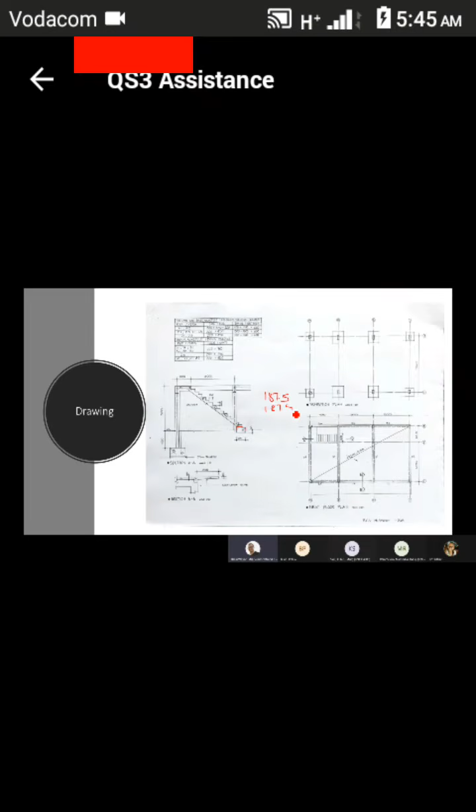So for me to ascertain what that height is there, I will take my front, 187.5. We'll see that. And I will assume that the back there is halfway into my next riser, and I say times one and a half, and I use that dimension there, and that gives me 281.25.

So for my back rise, for my back formwork, I will then say it will be a meter by 0.28. It will be the formwork at the back of my staircase, my stair base.

Right? And then I will also, now that I've done that, I now need to also measure the formwork to my risers. The formwork to my risers not exceeding 300 millimeters high, because the standard system tells us that for formwork to edges and risers not exceeding 300 millimeters high or wide will be measured in meters.

So I will now say that it's a meter wide, and I will now count the number of risers that I have over here. I will start from the top. 1, 2, 3, 4, 5, 6, 7, 8, 9, 10, 11, 12, 13, 14, and 15. So the formwork to my edges and risers not exceeding 300 millimeters high will be 15 times a meter. We'll have that.

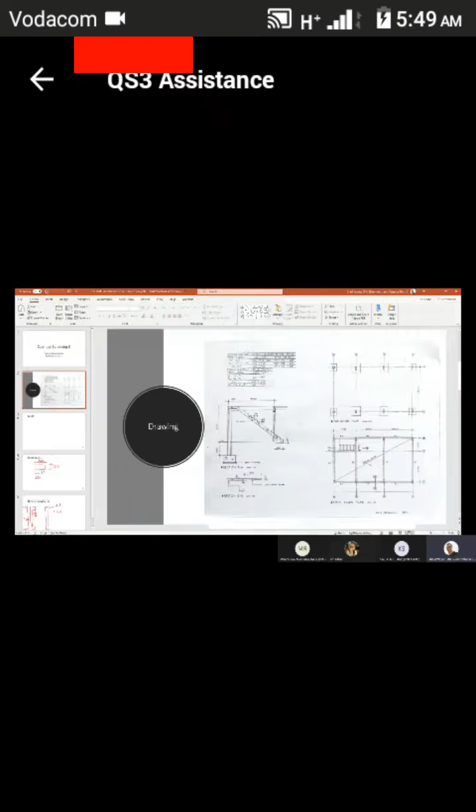Cooperating with me. So when I now look at my staircase, and I go further with my staircase, I would now look at the reinforced concrete that I need to supply in my staircase. The reinforced concrete will go in my staircase. If you can see, I will now have reinforced concrete go there,

there, and goes over there. Sorry, I've just drawn that roughly. But that is the concrete that will go into my staircase.

We'll say reinforced concrete 20 MPa, 19 millimeter stone, in stairs and landings. And I take that description straight from the standard system that says it will be in stairs and landings.

So I now need to first of all determine what this length is all the way down there. What that length is going to be. How do I determine that length? You'll notice that I have a length of 4 meter 400 in there. But where do I come on that length of 4 meter 400? Where do I come on that length?

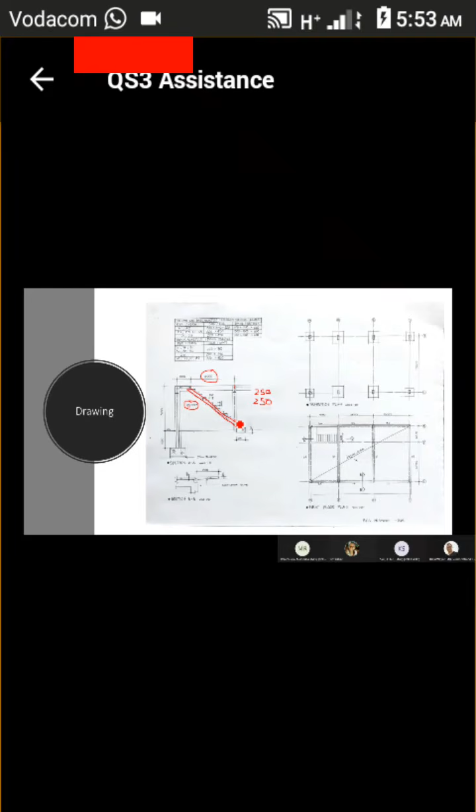I now need to add - what's the width? 250. And I need to add another 250. You all see that? Because my center - see, I need to add that, and I need to add that, because that is how far it goes. So there's 250 and 250 plus 3 meters. That gives me 3 meter 500.

You all with me? Yes, sir. So my horizontal, or my adjacent, is 3 meter 500.

Now I need to ascertain my opposite. Where's my opposite? I'm going to clear everything first. Again, you've got what I've just said here. Clear everything there. What is my opposite? Where will my opposite be determined from?

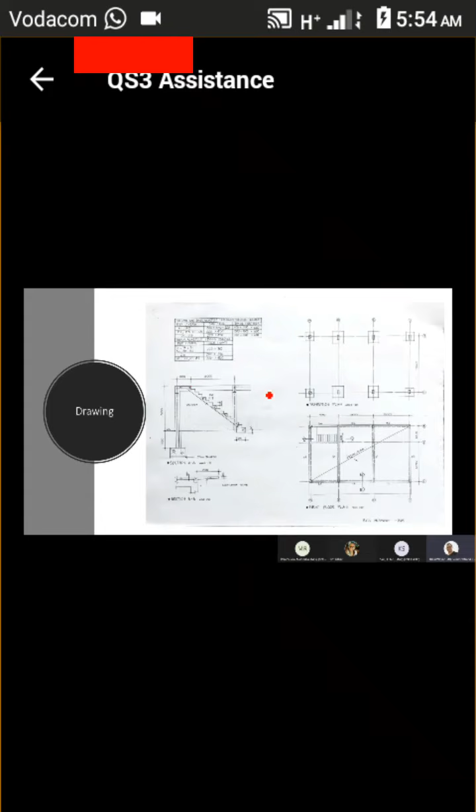I now need the height from there, from there. Let me draw it where it makes sense. I now need the opposite from there. From there to where? There. That's correct. I need that height.

I need that height. In order for me to get that height, I will take my 3 meters that I have here. My 3 meters is taken from the top of the slab, but I need to get to the bottom, so it will be 3 meters. I'll deduct my 150 - try and write a decent 0. Deduct my 150, which is my slab thickness.

What else do I need to do? I also need to deduct 187.5. All with me? Yes, sir. Deduct my 187.5. Anything else I need to deduct? Is that it?

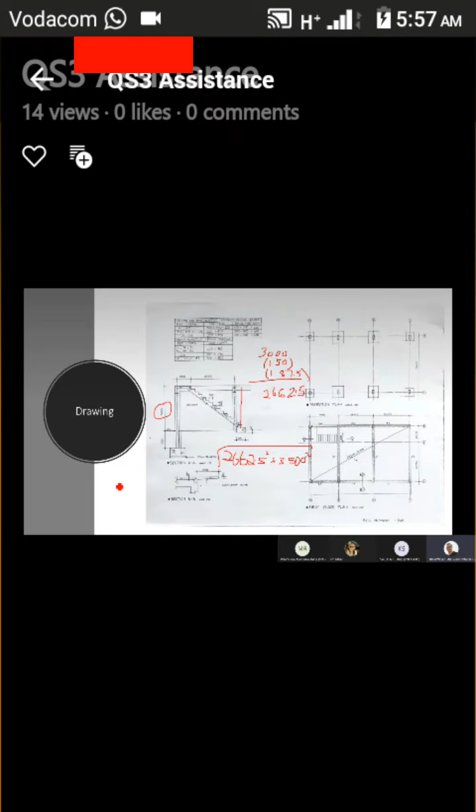Okay, so now I say 2662.5 squared, plus 3500 squared. The square root of that - what does that give me? I don't even have a calculator with me.

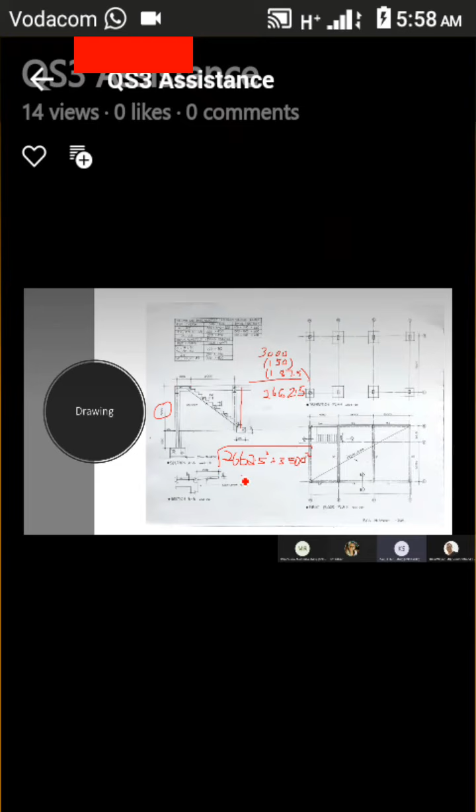What does that give me? It's 4,397.6 millimeters. But when I have to write that in meters, what will that be?

4.39 meters? No, it's 4.4 meters. You now see how I arrive at that 4.4 that I indicate in my dimensions. You see that?

Yes, sir. Right, so now you see that I'm taking my waist. Remember I said earlier that this dimension is what we will be working with first for the parallelogram that we had there, down there. So that will be 4.4 by the width of a meter by my 0.13, just for my waist.

And then for each one of my stairs, now 0.25, 0.19, and by length of those is meter, and that is times half, times how many? Times 15.

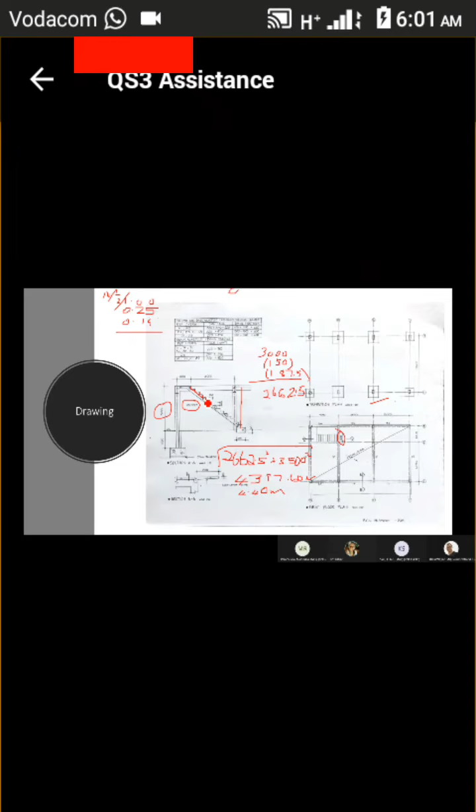Also remember that my lines are not the straightest, for my parallelogram that I had there. Can you see that my stairs, the actual stairs, that is 1, 2, 3, 4, 5, 6, 7, 8, 9, 10, 11, 12, 13, and 14. You see that?

You see that all this one here does, that first one, all that does is form a stair, yes, the riser to that very first stair, but it is not included in an actual stair that we see from there. Can you understand what I'm saying?

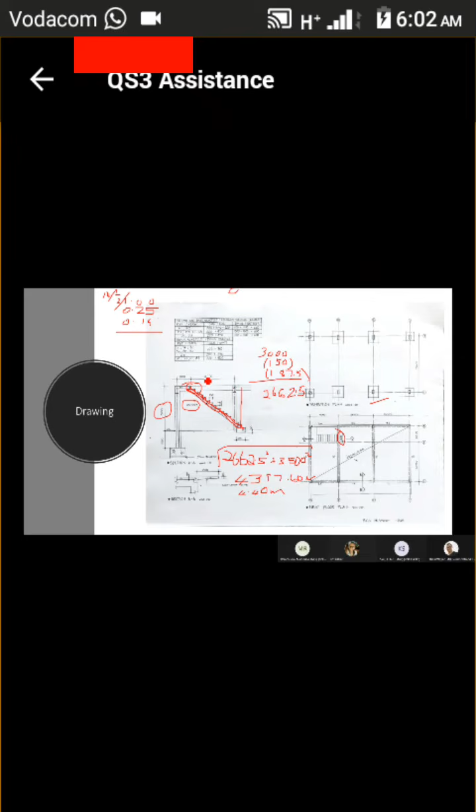I'm worried, there's silence now. I normally get a yes sir, but now I don't. Did you get what I said? I don't understand. Okay, I really don't understand. Okay, I'll show the rises again that I measured earlier.

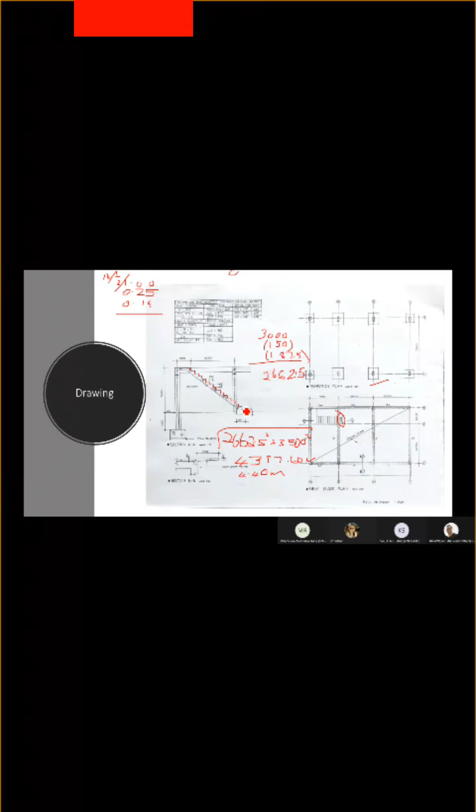The rises, count them with me. Got those rises, right? You agree with those rises? Yes, sir. Right.

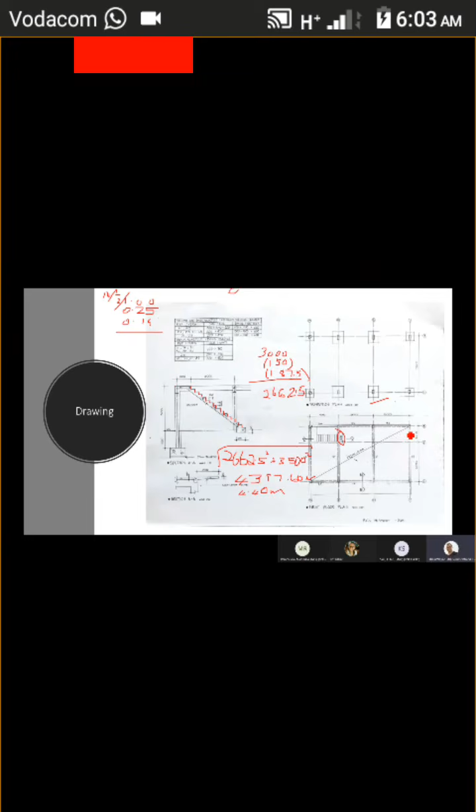Remember this slab, this forms part of the slab that we had measured here. You see that? Now I'm going to show the individual triangles for each stair. Oh, I wish I could draw this thing straight.

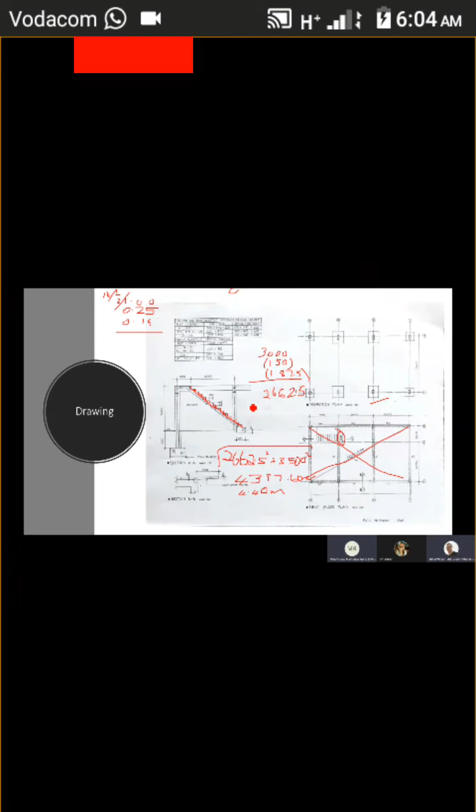How many triangles do you see over here? 1, 2, 3, 4, 5, 6, 7, 8, 9, 10, 11, 12, 13, 14. Do you agree with me? You see 14 triangles there? Yes, sir. Right, you see 14 triangles.

What did I leave out? I left out that one over there. See that? I left that one out. Why did I leave that one out? I left that one out because it forms part of the front of the landing, and it also has the same height as each and every riser that I have to measure.

Does that make sense? Understand that? Yes, it makes sense now. Thank you. Okay, so we have 15 rises but 14 triangular sections of the stairs, and that's why I've measured 0.25 by 0.19 times half because it's a triangle, and times 14 because I have 14 triangles there. All good with that?

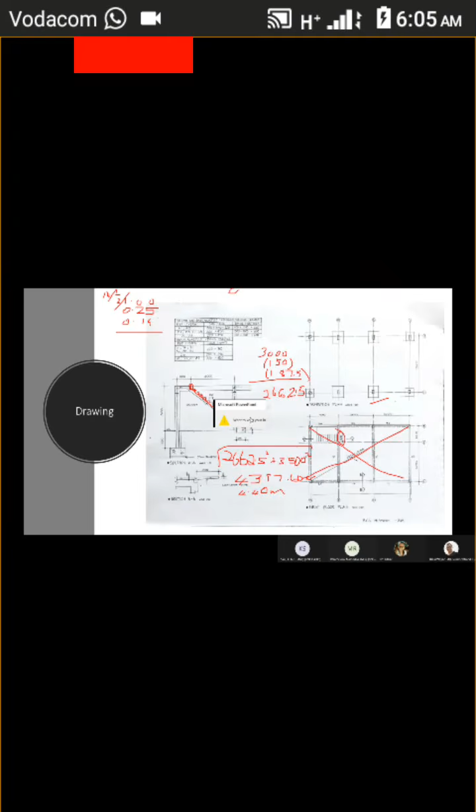Hello? Who wants to say something to me? I cannot see, I just hear that someone's trying to communicate with me. Who wanted to say something now? Mama Dinky, did you want to say something? No, it's not me, sir. No, not you. Okay, right.

But you do understand, okay. If we now go with our formwork and have a look at it, I'm just going to upload this again. It seems like some of us have serious issues with our connectivity.

If we have a look at the bottom here, remember that our stair base was measured there, and our waist was measured there. Can you see that I have this little triangle at the back? See that little triangle at the back? We have not measured the concrete to that little triangle there.

So I will say 0.09, the square thereof, plus 0.09, and the square thereof, and then the square root of that, and that should give me 0.13 for that dimension there, 0.13. Are you with me? You with me with what I've done there?

Yes, sir. Okay, now what is the significance of this 0.13? Because I had previously calculated the length of that going down there as 4.4. Remember that? For my concrete, I measured 4.4 meters. Remember?

Yes, sir, yes, remember. But now the 4.4 takes me to there. But for the formwork of my raking soffit, I want it to only be to there. So I need to deduct that section there. And what is the length of that section? 0.13. Are you with me? When I deduct that, I get 4.27. You now see where the dimensions come from that you've been wondering about. Make sense? Yes, sir, that makes right.

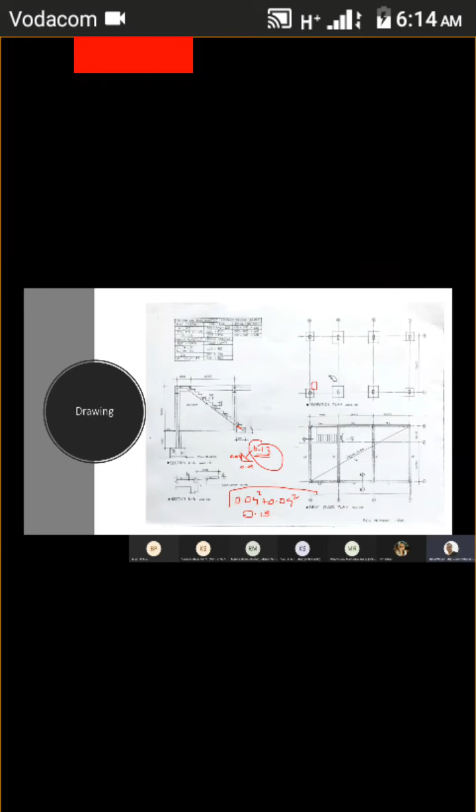And here comes the tricky part in what I will be looking at now. I now need to look at, and it's something that I trust that you would understand, that when we have a staircase, a staircase has steps. You agree with me? A staircase has steps.

And we need to allow for these steps as follows. You see these steps here. I now need to measure formwork to the rake and stepped outer edge of the stair, as you can see me drawing the steps there. Formwork to the rake and stepped outer edge of stairs. And I need to indicate... oh, I did not write that. Formwork to raking and stepped outer edge of stairs. And I need to indicate what the extreme width height is of this raked formwork.

I wish I was in front of you guys now with a board so I could illustrate this better. Writing with a mouse is not nice. I need to determine what the height is from there to there. And if I blow the staircase up, I need to determine what the height is from there to there.

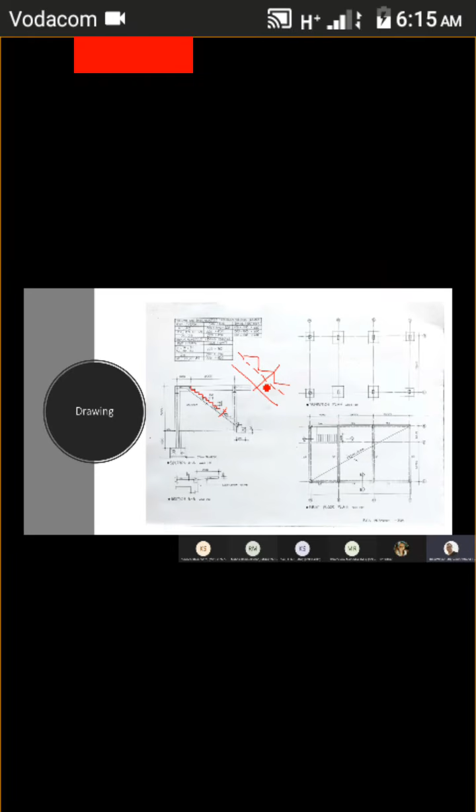I already know that from there to there, it is 125 millimeters, right? I now need to, in my description, indicate what that dimension, if I can call it X, is going to be. Just clear the clutter there. I need to determine what that dimension of X is going to be.

And how do I do that? I see that I have a triangle there, right? I have this dimension here, and I have this dimension. That dimension is 250. And this dimension is 187.5.

And if you look at my workings out, I say that this here is theta, over there. And I will say that the tan of theta will be equal to my opposite over my adjacent. So it will be 187.5 over 250. That tells me that theta equals, and if you say 187.5 divided by 250, that gives me 0.75. Is that correct?

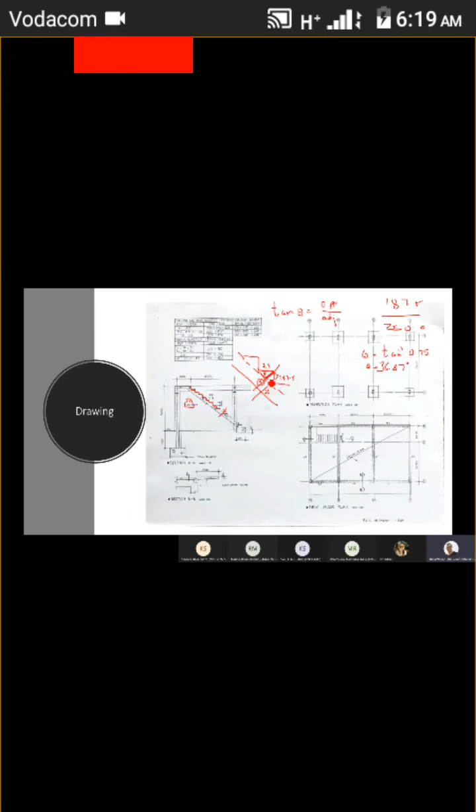So what do I have? I have this, I do not have this, I'm trying to determine that. I have that as 250. I have my triangle over there, I can draw that triangle separately. I would have... right, and that is theta. I have that as 250.

And I need this, this now becomes my opposite. You agree with me? So I've got my theta here, I've got that, but I need this. So what is that? This is my opposite. I will then say that the sine of theta equals my opposite over 250. You agree with me?

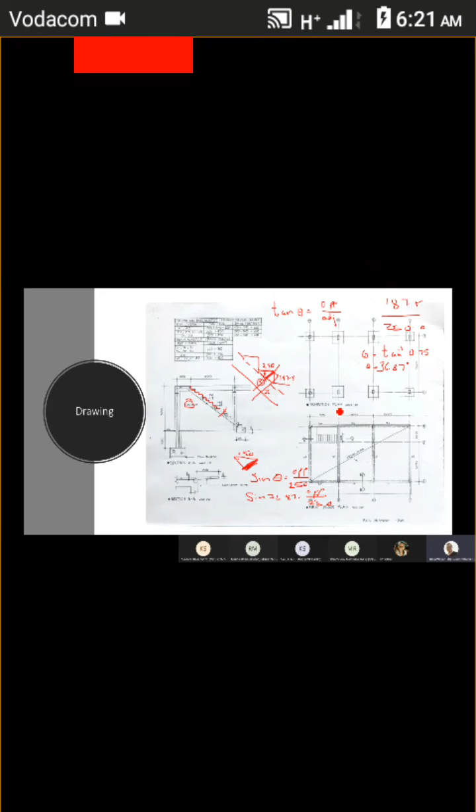I say that the sine of 36.87 equals my opposite over 250. You're with me? And that tells me I can take my 250 over to the other side. I take my 250 over to the other side, and I will say it is 250 sine 36.87 equals opposite. Is that correct?

Yes sir, is that correct? So if you calculate that, what does that give me? It tells me that my opposite equals 150. You agree with that? You guys are the math people, I'm not a math person.

So that's 150. So I now know that there is 150 and this is 125. Is that correct? So I say that my extreme would be 125 plus 150, and that says my extreme width should be 275 millimeters. So where you see that description, formwork to raking and stepped outer edge of stairs, see that description?

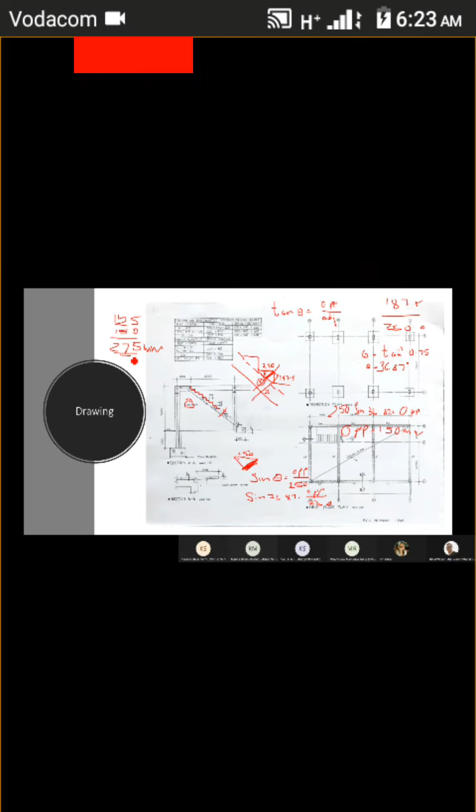The contractor now knows that when they price that, the extreme height of the raking and stepped outer edge of stairs must be 275 millimeters. We've determined that. Are you all with me now? Yeah. Are you all with me, ladies?

Yes sir. And where do we add this 275? The 275 would then go into your description. You see where the description says formwork to raking and stepped outer edge of stairs? Yes sir. We then add 275 millimeter extreme.

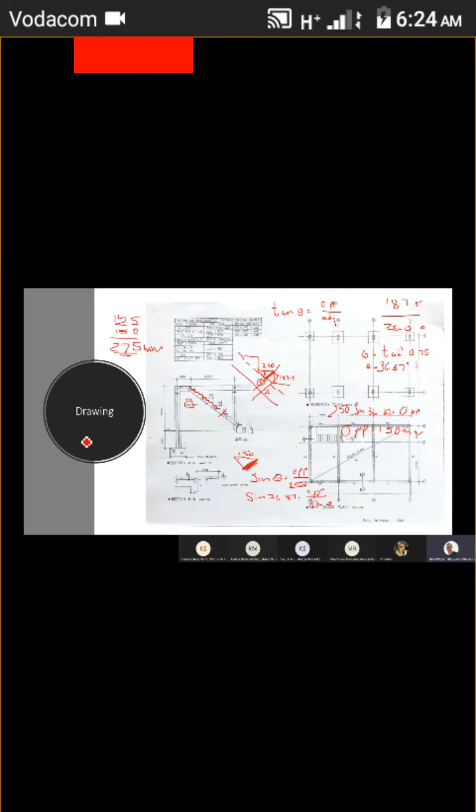So we have now calculated what the extreme outside of my formwork should be. We've calculated that as that 275 millimeter. I'm sure all of this will be available on the drawing that I'm just taking out now, on the recording.

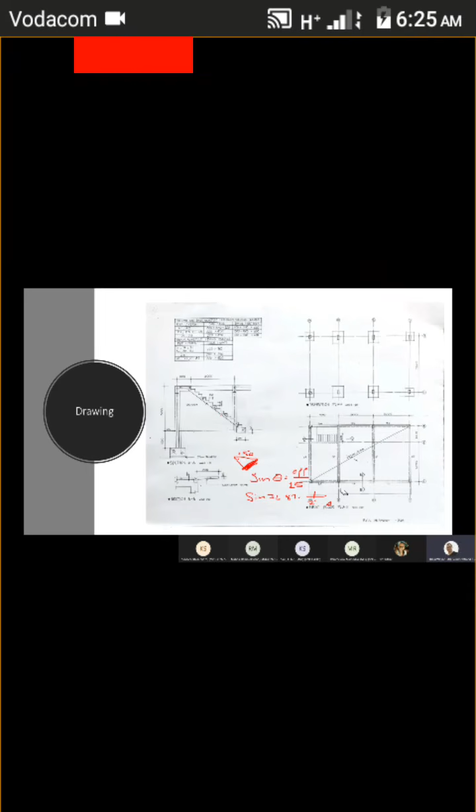So my dimensions there for that would then be 4.27 times 2, because we have two sides to our staircase. Right? We have two sides to our staircase.

Okay, are there any other questions so far? Who's glad they came to class this morning? Glad you came to class this morning. I'm glad I came, sir. I missed yesterday's. You missed yesterday. Yes sir, and yesterday was also an important one.

Right, so we've now done, that takes us to the end of the staircase. We've now measured the staircase, but this staircase needs to go in somewhere. And this staircase needs to go where? We need to have that opening there. We need to have that opening there.

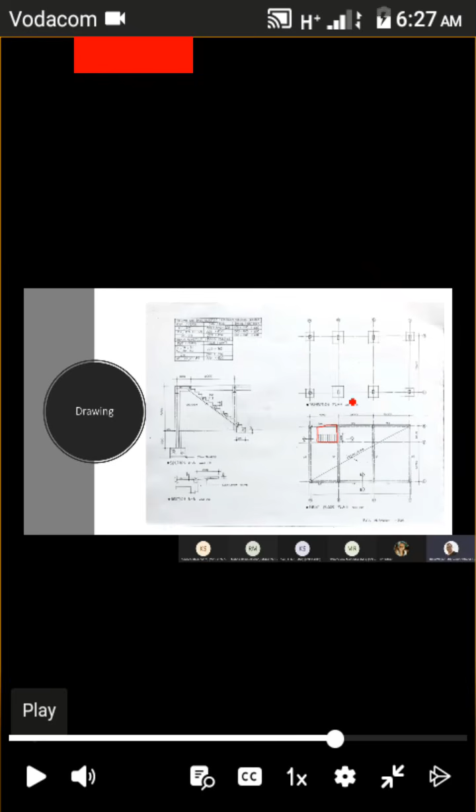That is created. So we now do the adjustments for the opening. Now the standard system tells us that no deductions shall be made for concrete, for openings for concrete not exceeding 0.1 meters cubed. In the same token, it says that no deductions shall be made for openings in formwork not exceeding 3 meters squared. Don't believe me? You can have a look in the standard system, it tells us that.

So what do we do first and foremost? You look and you'll see a note on my workings out. I've done a little calc for the opening. I said the volume of the opening is 2.89 times 2 times 0.15, which gives me a volume of 0.87 cubic meters. Immediately it tells me it exceeds 0.1 meters cubed, and I will deduct the concrete. Secondly, my area that I have is 2.89 by 2 meters, and it gives me an area of 5.78.

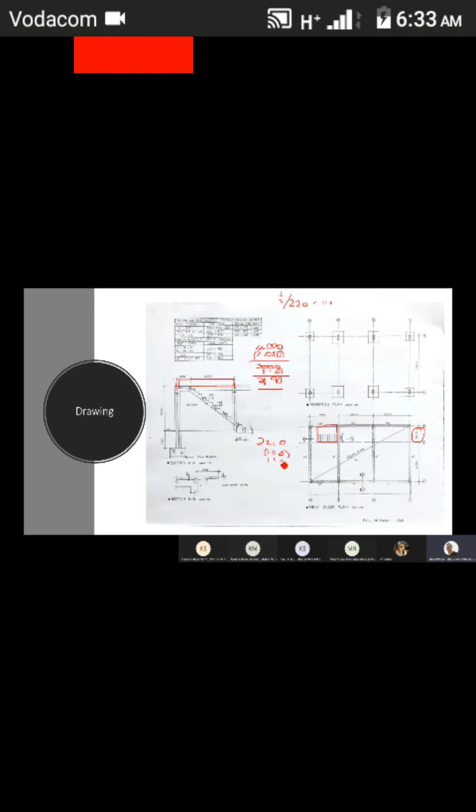Right. Now I turn this to the other side. I see that on this side I have 2210. But the 2210 takes me to the center of the 200 beam and to the center of the 220 beam. So I now say 2210, and I deduct half of the 200 beam, which is 100, and I deduct half of the 220 beam, which is 110, and that gives me 2,000.

You now see where I get my dimensions from, because remember, this takes me to the center, and that also is at the center of that beam. Are you with me with my dimensions there? With me, guys? Yes, sir. Okay, now you look at my adjustments for the openings.

I say deduct the reinforced concrete 20 MPa 19 millimeter stone in slabs, beams, and inverted beams. I say multiply by 0.15 for my concrete and deduct the formwork to the soffit of the slab. And my dimensions that I've just determined here would be my 2.89 by 2 meters by my slab thickness of 150 millimeters.

Yesterday, Mr. Brown William asked me about this adjustments for the openings, and now today he's not here to see what I'm referring to. So I'm saying 2.89 times 2, and for the reinforced concrete it will be times 0.15, and for the formwork it will only be the 2.89 times the 2.

We all know what an isolated beam is. We know what an isolated beam is. An isolated beam, if I say that you are isolated, if you are on an island all by yourself, would you be isolated?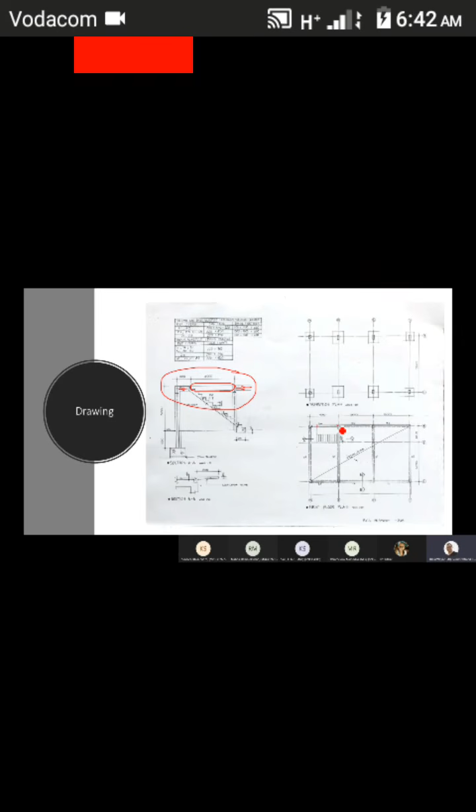If we look at this beam here, you can see that that beam is not attached to anything, apart from the beam on the side. From there to there, it is not attached because we have an opening over there. Can you all see that opening? And this slab that runs through there tells me that this is an isolated beam because there's no slab attached to that.

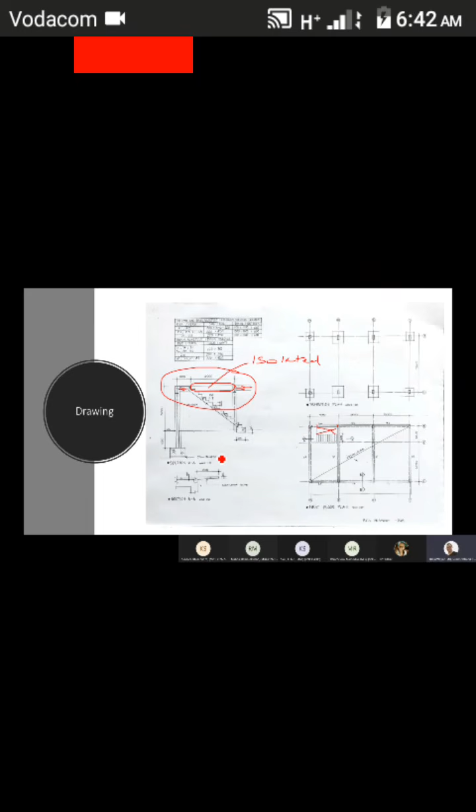So remember that we have already measured the sides and soffits of those beams. Now the standard system — I'm going to take you back to the standard system quickly — tells me we're dealing with formwork. Formwork to slabs, beams, and stairs.

That formwork to sides and soffits of isolated beams, including propping below, shall be given separately. That tells me that the beams I've measured previously can no longer be left as part of beams, because I do have a section where there is an isolated beam. An isolated beam, guys and dolls, is where we have no slab attached to that specific section of beam.

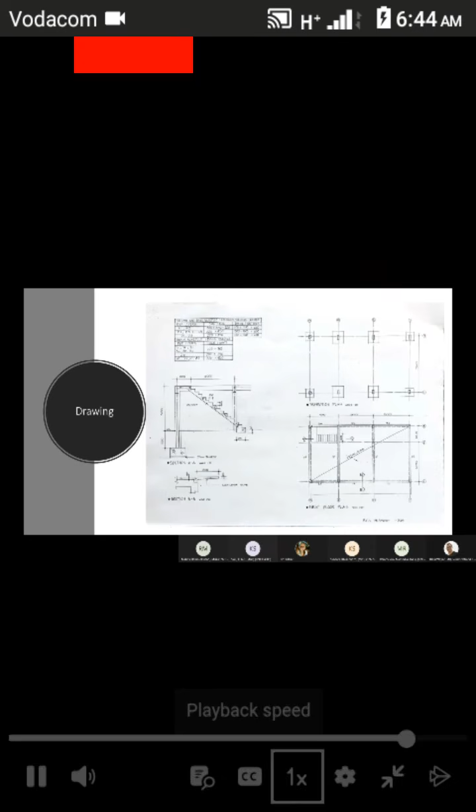And you can see on the drawing, if I go back into my drawing again, you can see that this section is not attached to any slab. Can you all see that? It's important that you confirm that you can see that. Guys, it's important. Can you see that? Can you not see that?

Everybody with me? I cannot hear. Well, I'm just trying to understand, sir, that concrete below the landing — what is it? I'm not with you, you say that below the landing. Yes, that one, this I don't understand. Yes, okay, that one, sir, where my cursor is.

Okay, you see that section there where the slab is? It is this beam, this part of the beam. No man, not that. Okay, this part of the beam. This part of the beam there is attached to that slab, right? You can see that.

But this from here to there, that beam is not attached to any slab. Can you see there the lines? The line that you see over there, and on that same side — on the other side it is not over here. You do not see that there. Can you see that?

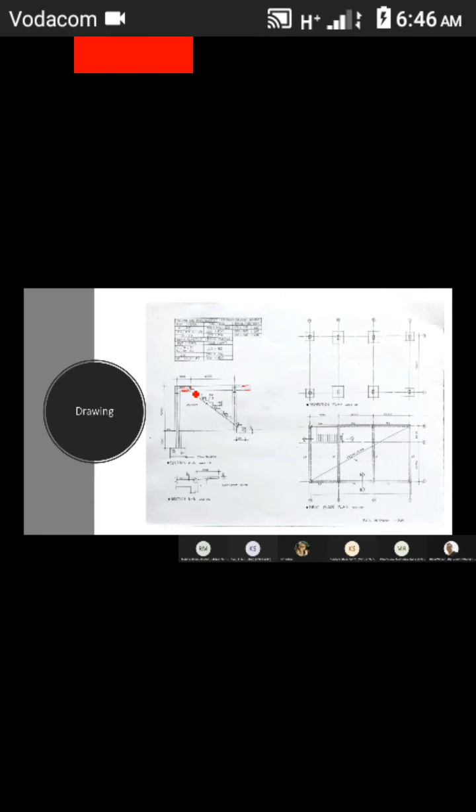Yes sir, right. So with us having that — I'm trying to neaten this — with us having that it means this section is now isolated from the slab. That is isolated from the slab, and we call that an isolated beam. So I then say, deduct my formwork to the sides and soffits of my beam as measured previously, and I would then add formwork to sides and soffits of isolated beam, including propping, exceeding 1.5 not exceeding 3.5 meters high.

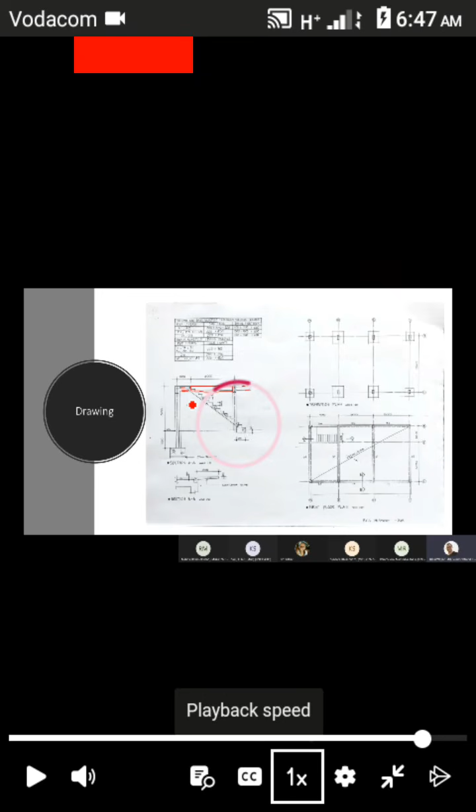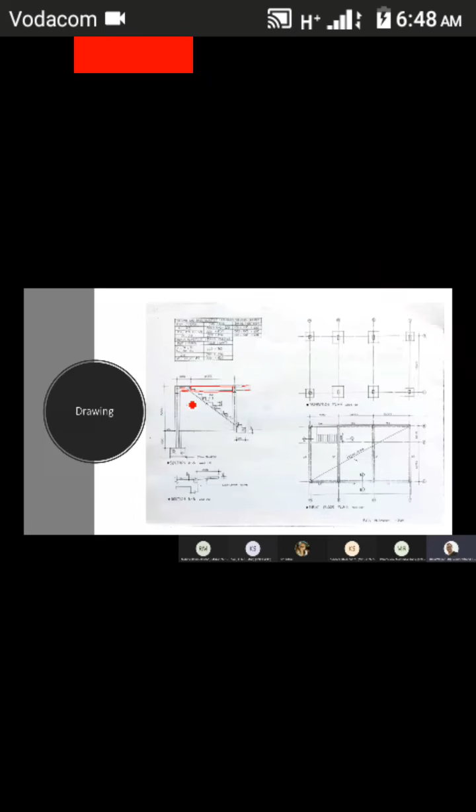Bearing level. So I've got my length of 2 meter 890. I've got the girth of that beam, determined as follows: I have my 220 for the soffit of my beam, and I know that beam, at 3A — if I look at my beam schedule, the beam schedule at 3A tells me it's 300 deep, so I have 300 and another 300. I add all of those, that gives me 820. So I have my length of 2.89 multiplied by my girth of 0.82.

So I deduct the formwork to the normal beams and I add the formwork to the isolated beam. Why do I keep them separated? It is because it is more expensive to do the formwork for an isolated beam, because that will now not be attached to the slab.

In the same vein, I will deduct my reinforced concrete 20 MPa 19mm stone in slabs, beams, and inverted beams, and add my reinforced concrete 20 MPa 19mm stone in the isolated beam. My dimensions are 2.89, 0.22, 0.3. The reason for keeping it separated is because it is more difficult to pour the concrete into that isolated section, as your waste would be more and it would be a little more costly.

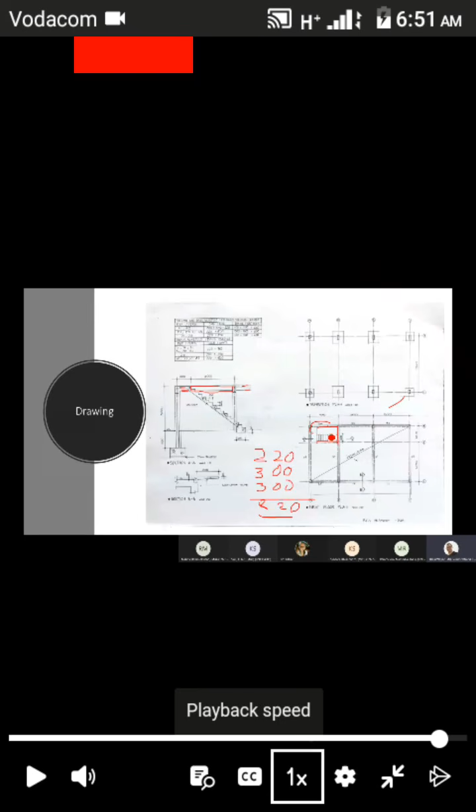You might ask me why I measure that. I'm measuring it because if you recall, I deducted the girth, this full girth over there, and added it back. So I add it first, and then deduct it when I do my isolated beam. So I would say formwork to sides and soffits of beams as before, and that will include the 150 millimeter high over there, 150 millimeter high over here, as well as 150 millimeter high on that side.

And that, ladies and gentlemen, brings me to the end of my adjustment, as well as to the end of my concrete structure. Are there questions now? This is where you get to bombard me.

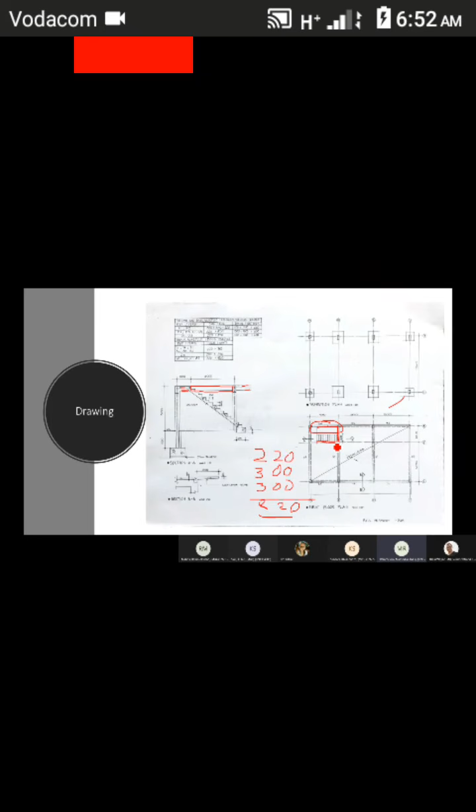No question, sir, can you please explain to me how you got that 0.82? Because I got a bit confused there. I don't understand, which one is that now? The 0.82, where you added that. Yes, sir, the 0.82.

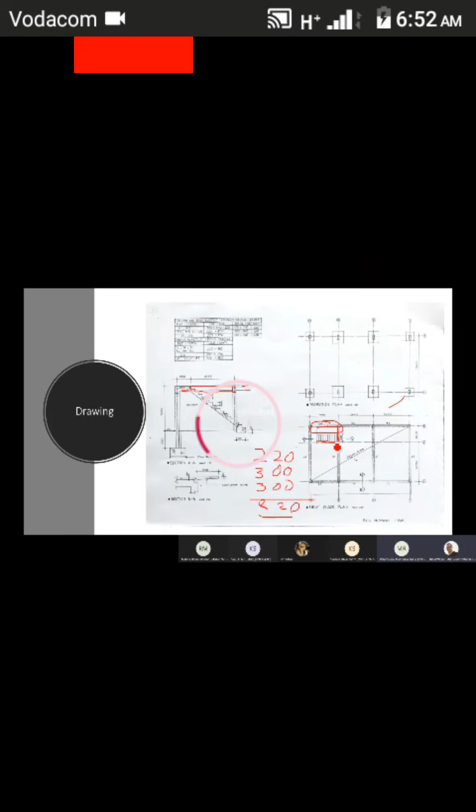Yes, sir, yes, sir, this one over here. Yes, sir. Okay, you see what I've done?

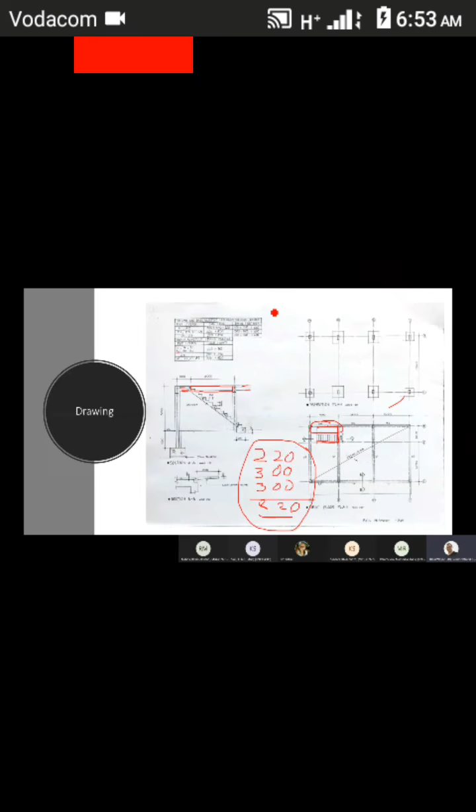With my beam 3A, these are the dimensions for my beam 3A: 220 and 300. Now remember that we are creating this as an isolated beam, that there's no slab on this side, there's no slab on that side.

So what am I doing? I now need to deduct the formwork there: this 220 plus this 300 plus this 300. So the formwork for the isolated beam - first of all, for my normal beam, I will have to deduct that formwork, and then add formwork to my isolated beam. You understand what I'm saying? Yes, sir, I understand now.

But in the very last description, where I say formwork to sides and soffits of beams, previously we had a slab that went through there, it was 150. The slab through there was 150. So I now added the 150 over there first and foremost before I could deduct all of this, and in order for me to add my formwork to my isolated beam, that is where I had added that.

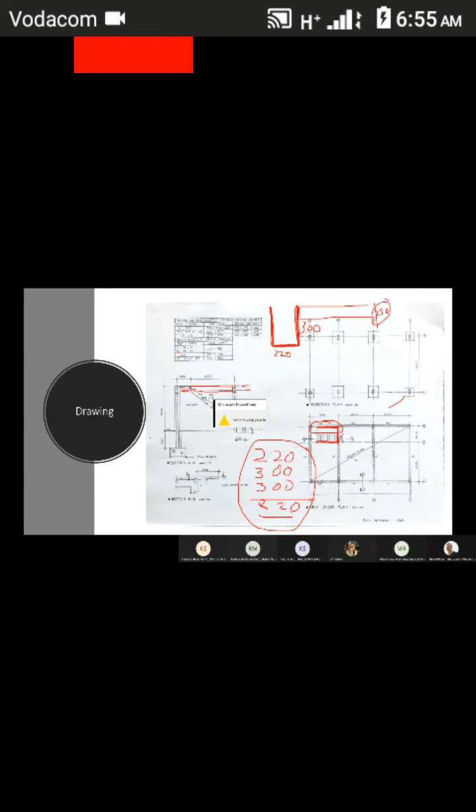Are there any other questions that anybody would still want to ask me? Nothing. I started out with the ladies and I'm left with the ladies again. I feel so important - guys have dropped.